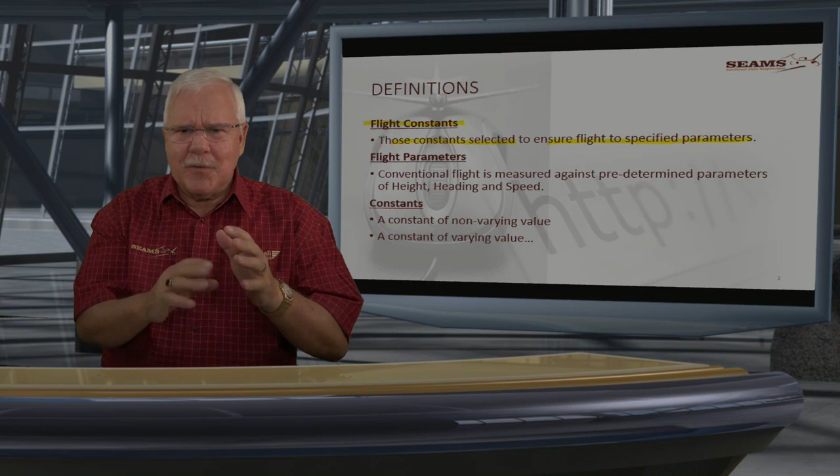We normally select a speed that we want to fly, or we put a certain power setting and the result is what it is. Such as, for instance, cruise power. If you put cruise power in straight and level, the speed you get is the speed you get. You don't control your cruise power, you put cruising power and the resultant speed can change because of weight, density, altitude, and a lot of stuff. I'm talking airspeed now, not ground speed. All right, speed, that's the one thing.

And then heading. We're always asked to keep the heading a constant, or to change the heading as a constant, in other words to use a constant bank. We don't fly around like that. So those are the basic constants that I'm talking about, and they determine the flight parameters that we want to be. Right, we'll get into that.

Flight parameters: conventional flight is measured against predetermined parameters - height, heading, and speed.

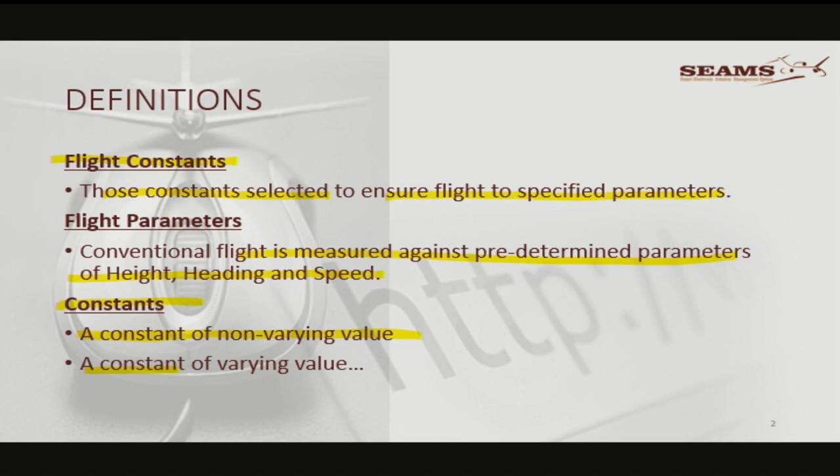Constants. Now I just want to make sure that when I talk about constants, we're not talking about haphazard things happening. A constant is a non-varying value, or I can talk about a constant that's got a continual varying value. Just to take the bank as an example: if we bank at 30 degrees, that is a constant, and the rate of heading change is a constant. We're not putting that and then less, and...

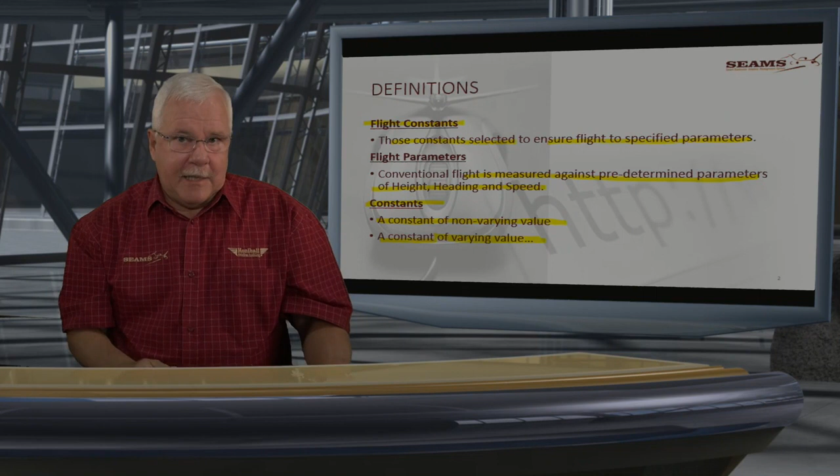So remember, we need to get a point of departure where we're talking about how do we control those parameters that we are looking for in flying.

So here, at this stage I've only spoken about height, heading, and speed - a little bit tongue-in-cheek, but remember that I know we manipulate the power as well. Yes, I know you use the radios and stuff like that. But the things that will control the height, heading, and speed is through the controls of the aircraft, and you can say that the power is one of the controls.

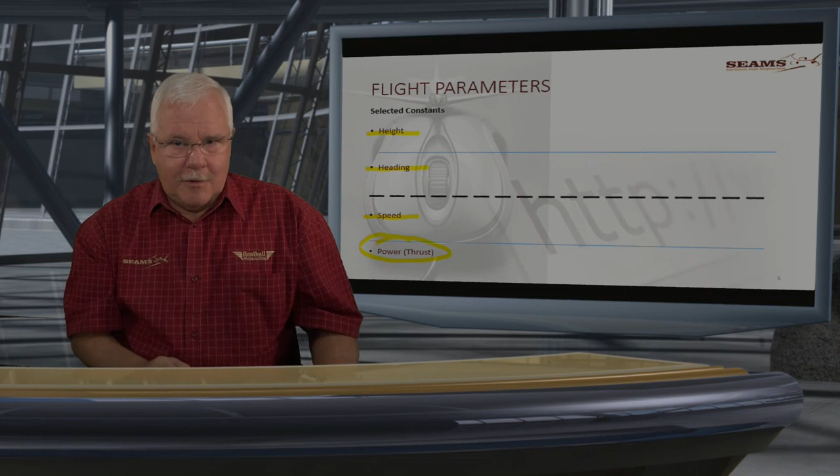So when I look at the parameters, I will say there is either a selected constant or it must have a constant change. Or in certain cases it is just, in fact, a constant. Now what I'm saying here is height is selected to be a constant. Let's say we're looking at, we want to maintain 7,000 feet - then it is a constant, then there's nothing further to do about it.

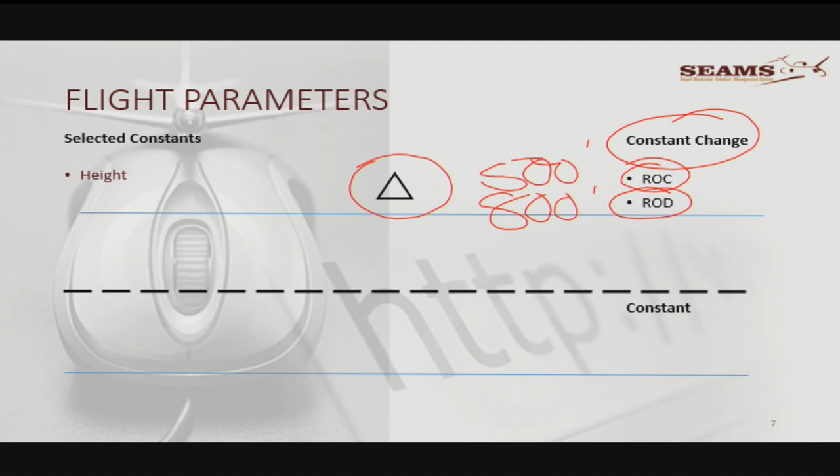However, let's say we want to establish a rate of climb or a rate of descent, then there must be a change - I used the sign delta there. But I say that change must be a constant. We're either going to climb at 500 feet a minute or descend at 800 feet a minute rate of descent, or whatever is selected. But that change, again, is not a faster and a slower and a faster and a slower - the rate of change of height needs to be a constant, will be a constant, not always a selected constant.

If I want to change the height and I just simply push the nose forward and the speed increases, then the rate of change can be anything. Or I will select that.

Now normally, when we do a descent, we want to descend from a flight level to a position where we can start the approach at an airfield. And that descent must be planned very well. In other words, there's a distance, and it'll take us so much time to get there because of the ground speed. Therefore, to get rid of this, we'll have to descend at a certain rate. So those things are selected.

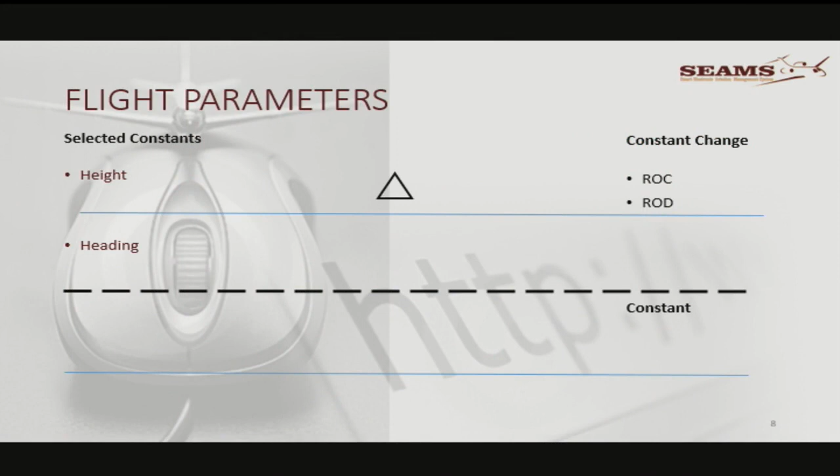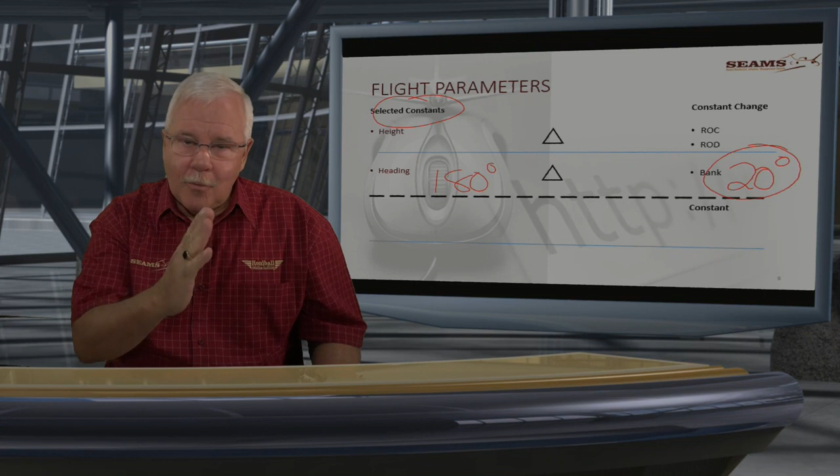It means you must continue and maintain a steady bank of 20 degrees. In instrument flying later on, we're going to say we want you to do a certain rate of turn, and there are rules of thumb on how to work out the bank angle to give us rate 1, rate 2, or rate 3 turns. But that is coming in the future. For now, let's concentrate and say the flight parameter heading is either a heading or a specific bank. Those two go absolutely hand in hand.

And then speed - I've just changed the sign because I had to say, hey, whoa. We don't want a constant change in speed. There will be a constant change in speed if we do, for instance, a loop. But we're not doing aerobatics, all right? So there's not a constant.

From flying level, let's say having excess speed and then eventually settling on your speed in the climb - I know there is a change of speed in the entry into the climb. I got it. But this is not the moment where I want to talk about this.

We want to look at the steady climb speed. We want to look at the steady cruise speed. We want to look at the steady descent speed. We want to look at the steady approach speed, and so on.

And when we make the changes, yes, there will be a change - let's say the final speed is 90 knots and the VREF is 80 knots, then somewhere the speed is going to be bled down from 90 to 80 knots, just an example. But what I am saying is that speed is normally a constant, selected or as a resultant.

Why do I say as a resultant? When I fly straight and level and I've put cruising power - let's say the cruising power in a Robinson 22 is 18 inches or 19 inches manifold absolute pressure - I put that, and the speed I get is the speed I get. So that is a resultant.

And that will stay a constant. If I don't make it heavier or lighter or anything, it'll stay a constant. Yes, I know in the long term you're going to burn fuel and so on, but remember, we're talking about the principle in the wider sense.

When speed is selected - when do we select a speed? Well, when we join a circuit. We will say, all right, the downwind speed is this, the base leg speed is that, the final approach speed is that. So those are speeds you are selecting, and you then change the power and everything to get the selected speed. So there are no continual changes, so to speak.

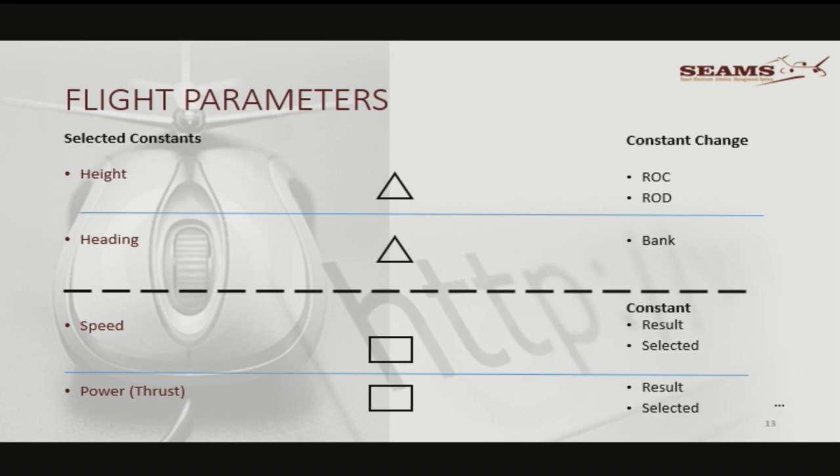Power or thrust, again, is a resultant or a selected value. And how can you say that? Well, I can fly straight and level and I can select either all the power, or I can select max continuous power, or I can select cruising power. So power is something that I can select.

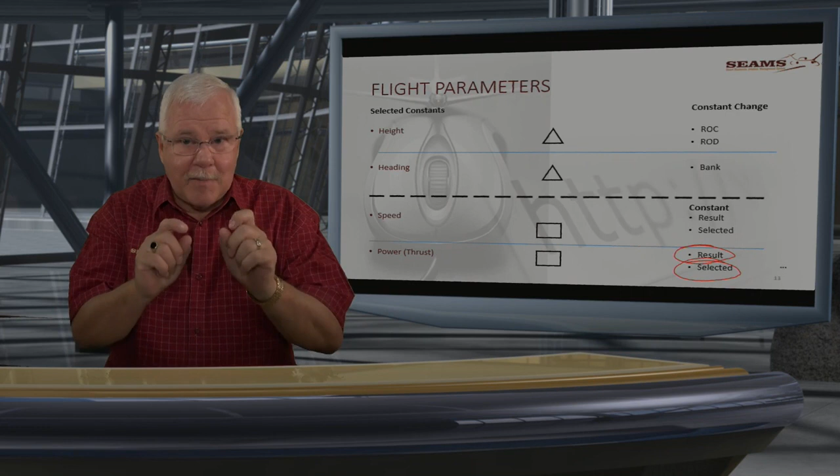Or it can be the resultant. And by the resultant, I mean what is the energy output? I get into this aircraft, I pull all the power, and it's going to give me X power. Maybe one engine is not as fit as the other one, it'll get different results. But sometimes we use power - if the power is completely down, there will be a certain result; if the power is completely up, there's a certain result. So if you select power to have it full, that's it. But I wanted to say that the power available is not always a constant.

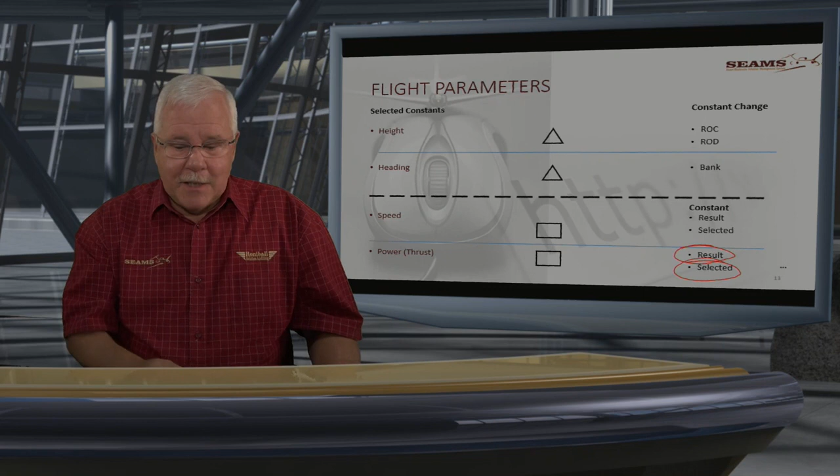But it is a result. It is there. It's not something that we determine in the air, it's already there on the ground.

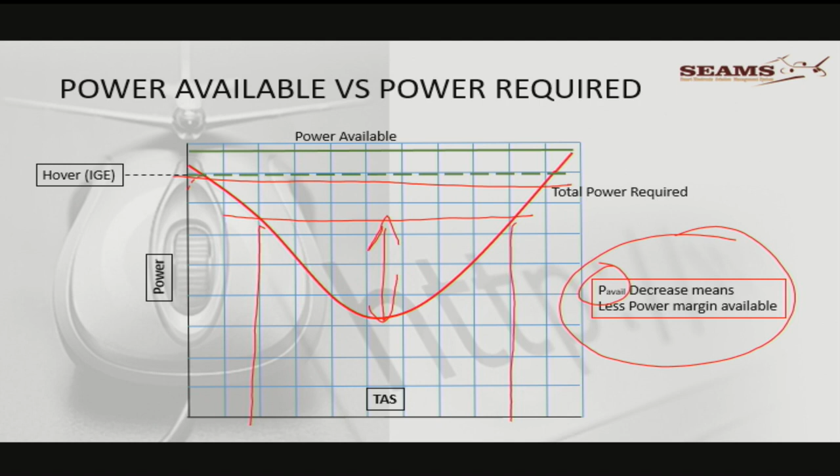Power available decrease means less power margin available. If my power available is less due to increase in height, you can see that the excess power, and obviously the operating speeds and height and everything, changes with it all the time.

Three speeds—just wanted to recap that. The first speed here at the bottom is the so-called Vy, and for Vy we're going to need so much power. Have we got power? Yes, we've got so much power—this is all the excess power that we've got there. Or if we get to our lower speed, formed by that tangential line we put there, we can call this the endurance speed.

And the endurance speed—you can see there is less power available, speed is less, drag is less, but on the total drag curve it shows more.

Then, when you draw this tangent in, you get your range speed, and that speed is roughly Vy times 1.32. That speed is the one we use, including in the descending we discussed—we climb and descend between these two ranges.

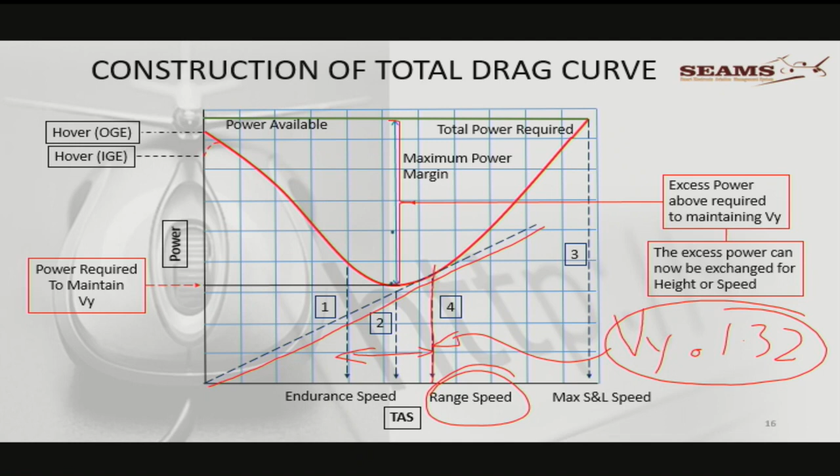That has been said in the previous presentation. Excess power above can now be exchanged for height or speed or whatever—same story, we've seen that.

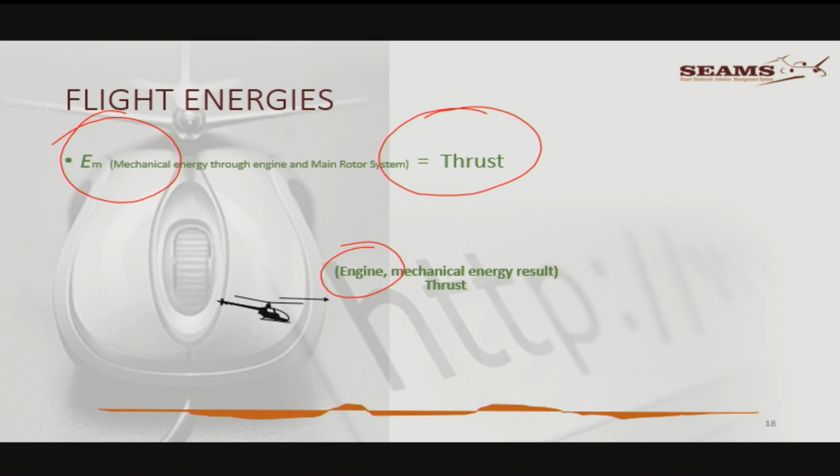When we look at flight energies, this is a concept that I need you just to understand—it's not a big deal, but just know that they are there. The first one is mechanical energy, and mechanical energy is simply thrust, due to the engine. Yes, you could say potential energy gets us there too, but I'm first dissecting the three different main energies that come into play. The next one is height.

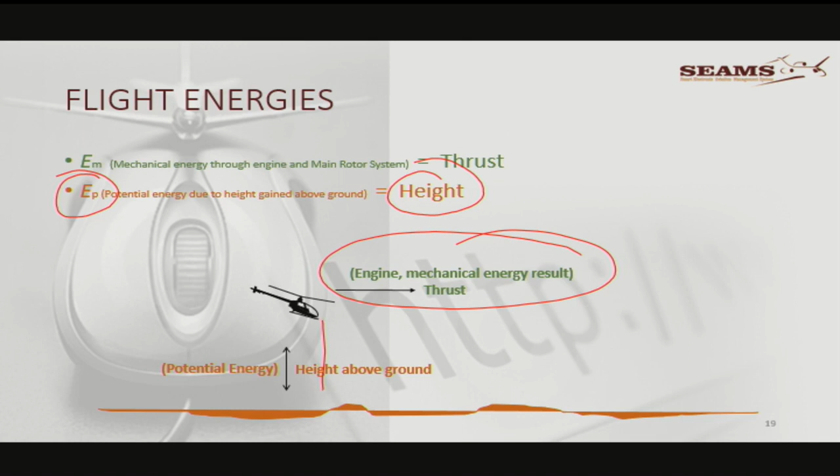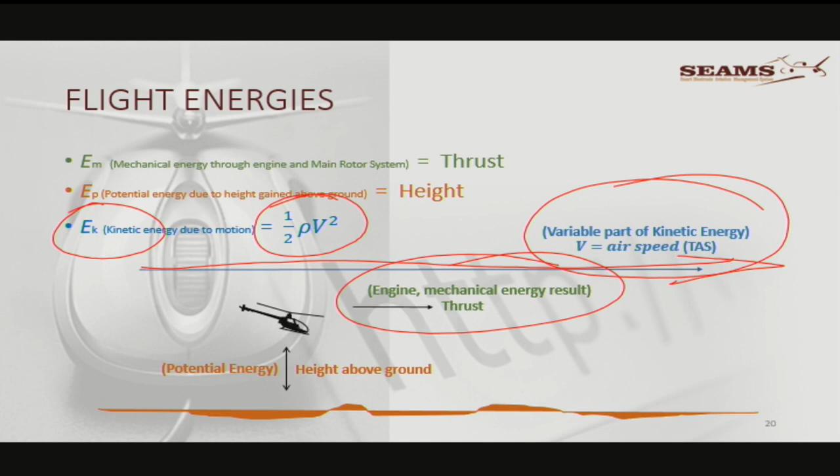Height is potential energy. So now we've got mechanical energy and potential energy. And then we've got kinetic energy, half rho v squared, which is the amount of forward speed that we've got. So there's one energy, one energy, and one energy—those are the three energies.

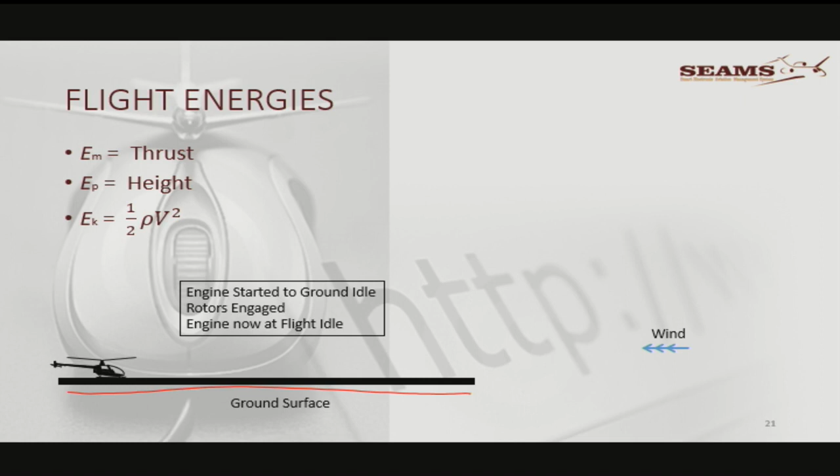So now let's look from takeoff into the hover and forward flight. What are we doing with those energies, how do we exchange them, and what happens to them? Engine started to ground idle, rotors engaged, engine now at flight idle, ready for takeoff. We've got the ground at the bottom, wind coming from the front. Now on the next slide it doesn't go forward—I'm just showing it's now moved into the hover.

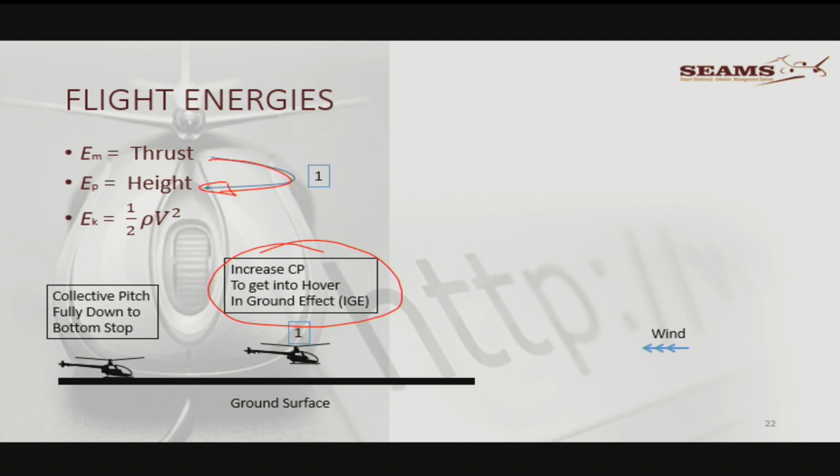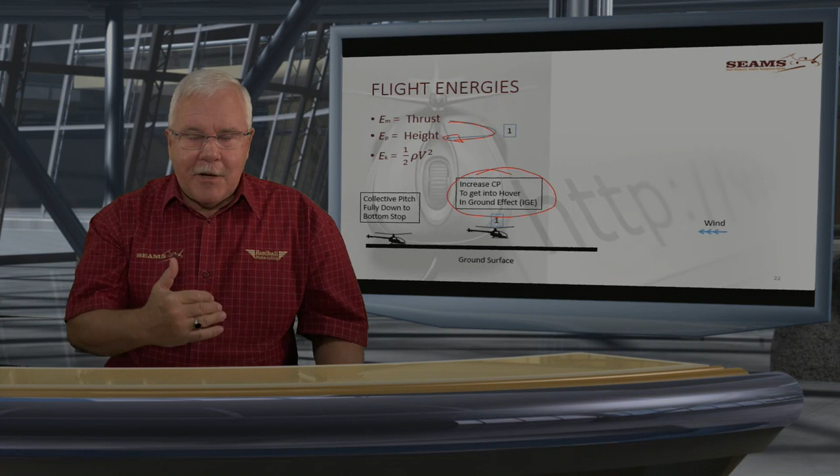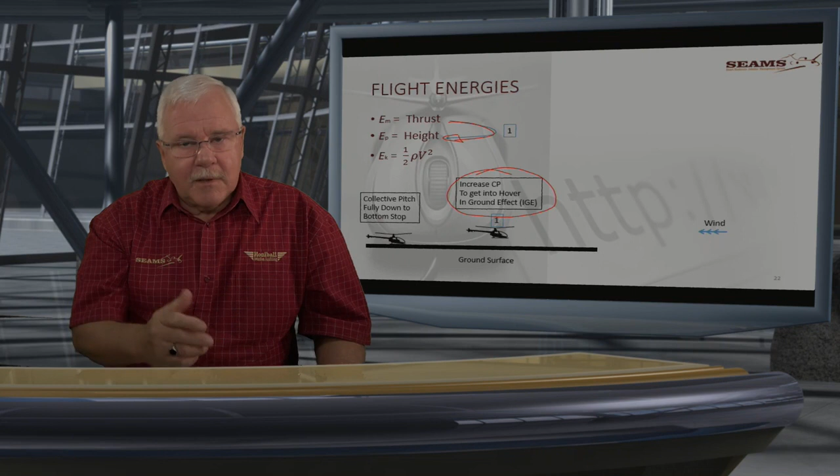That's all I'm trying to say—it's not moving forward. Increase in collective pitch to get into the hover, in ground effect. How did we do that? By simply taking thrust and putting that into height. We used the first amount of energy, mechanical energy, to get a little bit of potential energy, which in many cases in the hover could be 3 feet, 6, 10, 12 feet, depending on the size of the helicopter. Remember, in-ground effect is also a safe height, so that if you get an engine cut in the hover, you can survive the landing on a single engine, or obviously a multi-engine as well.

Now, once we got into the hover, that was the first power exchange—to get height, which was the potential energy. And now, at the same height, we're going to use the excess power to start creating a little bit of speed.

Allowed forward motion through the cyclic movement forward, increase the collective pitch slightly to go through transition. Once we have got the speed, we want to maintain the speed and climb up. At 40 knots, increase to climbing power, cyclic slightly rearwards to climb the helicopter.

At this stage, with the energy exchanges, we are still maintaining a certain amount of thrust to maintain the speed, a constant. We want to keep velocity constant, and then the excess power is put into height and into the climb.

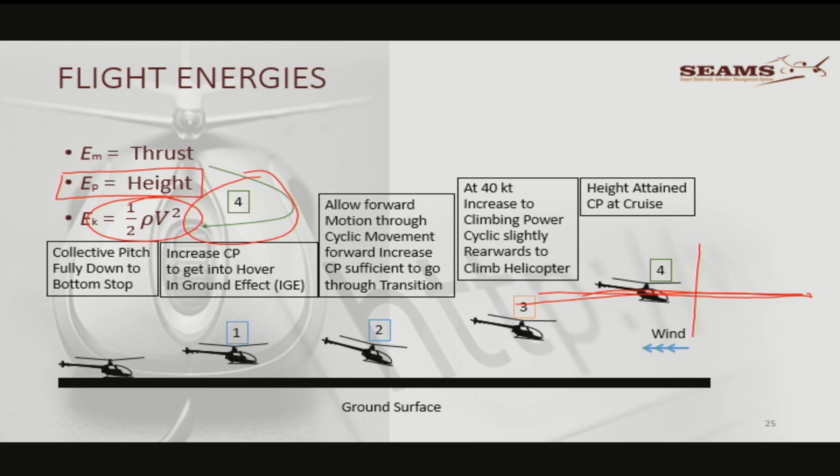Once we level off, we do not want to climb anymore, we have already satisfied the height, we want to just fly straight and level. Now if there's any excess thrust left, and you put normal cruising power, the speed will increase and the energy will go until the aircraft has reached its maximum cruising speed for the amount of energy available. But now it's level, it's already got its height. That's just normal cruise.

So energy usage and energy available are there to support the required parameters. Bringing the two together, kinetic energy, speed, will always be the primary concern and is dependent on either power from the engine through the main rotor or energy due to height gained, potential energy. Potential energy, the height, will always follow the satisfaction of the basic speed requirements.

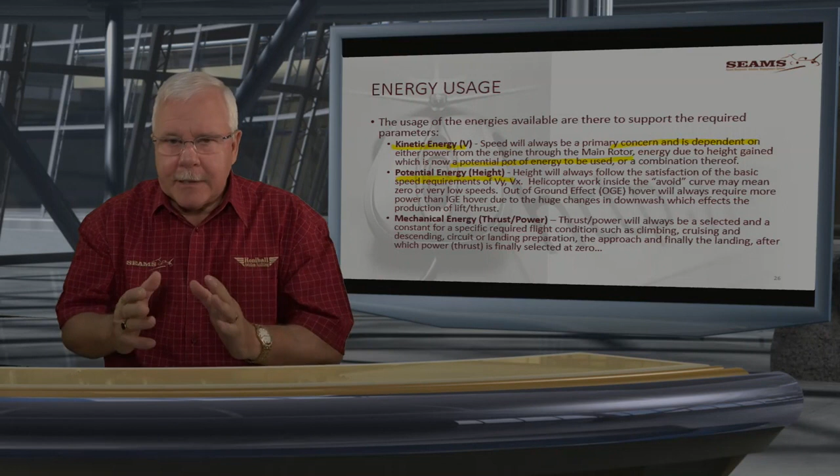Now you're going to say to me, yeah, but what if I climb vertically? Yes, you can. You can use all the excess power and don't have to put it into speed, you can put it into height in the hover, in a vertical climb. No problem, you can do that. That's not how we normally use it if we get airborne out of a confined area or stuff like that, but eventually we're moving from point A to point B. But yes, you could put it directly into potential energy. That's why it's called a helicopter.

So the helicopter works inside the avoid curve, meaning zero or very low speed. Out of ground effect, however, means always more power than in ground effect, due to the changes in downwash, which affects lift and thrust.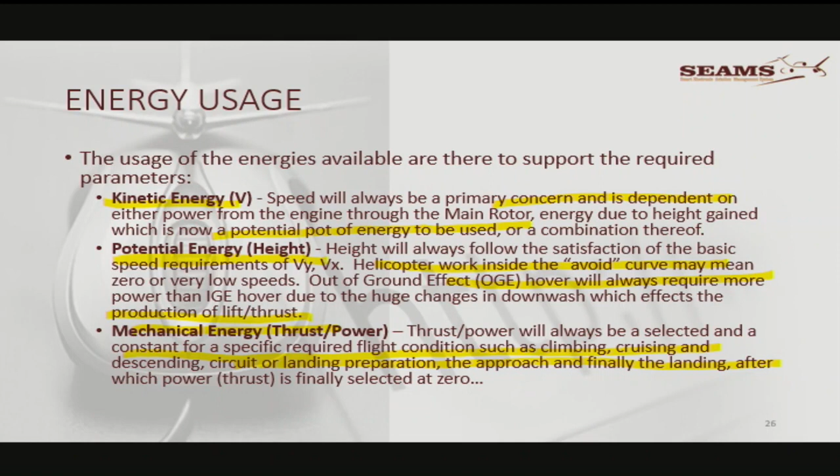Mechanical energy will always be selected to a constant specific requirement, whether you want to climb, cruise or descend, circuit or landing preparation, approach, and so on, until finally when you're on the ground, you will select it to zero.

Now, let's go over to the selection of constants in straight and level flight. I need not just the instructors, the newcomers to the game must look as well, but the instructors too. Straight and level: straight means to give heading in a straight line, so the heading is a constant.

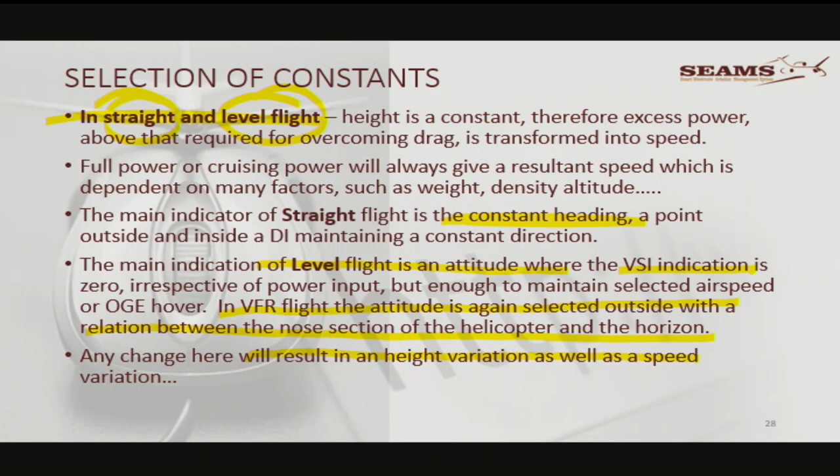And level means that height is a constant. How will we know that the height remains constant? By the VSI indication, irrespective of the power input, but enough to maintain selected airspeed. In VFR flight, the attitude is selected outside with relation to the nose section of the helicopter and the horizon. Any change there will result in a height variation as well as a speed variation.

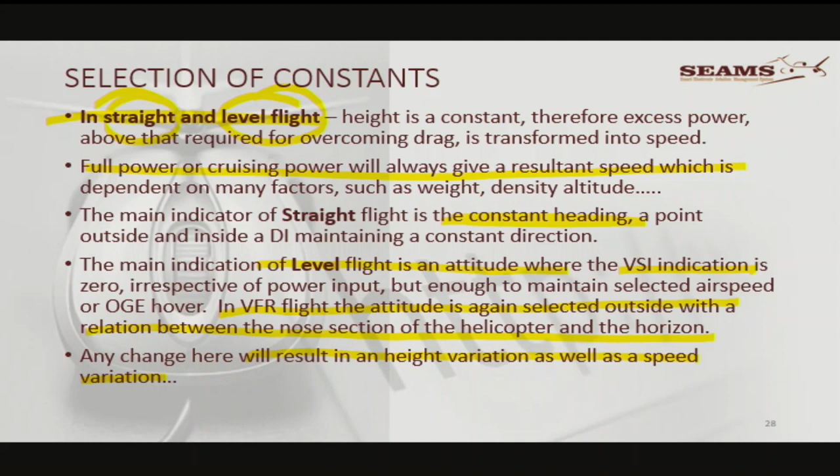Full power or cruise power will always give a resultant speed which is dependent on many factors. The point is that straight and level means: I want to maintain a certain heading and I want to maintain a certain height. That is straight and level, not climbing. That's what it means. So those are the constants that we want to have.

But if we climb, and I'm not taking zoom climb into consideration here, it's a pre-selected speed we want to climb at. The speed will require a certain amount of energy to maintain, and the rate of climb is dependent on the excess power.

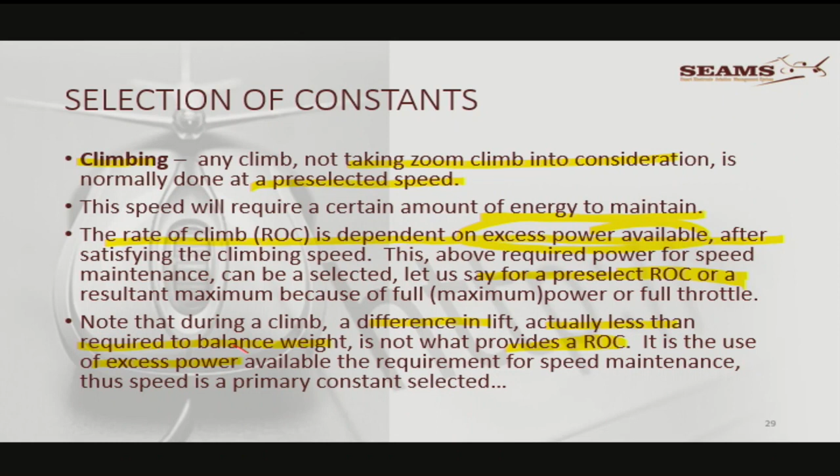Or you can say, look, I want to have a specific rate of climb. Note that during a climb, a difference in lift, actually less than that required to balance weight, is not that which provides rate of climb. It is the use of excess power that gives us the ability to climb.

Climbing, again, only when the selected speed power requirement is applied, the rest can be converted, and we've said that now many times. The use of too much energy for the climb will result in an increased rate of climb and a decrease in speed. Autorotation speed must be kept in mind.

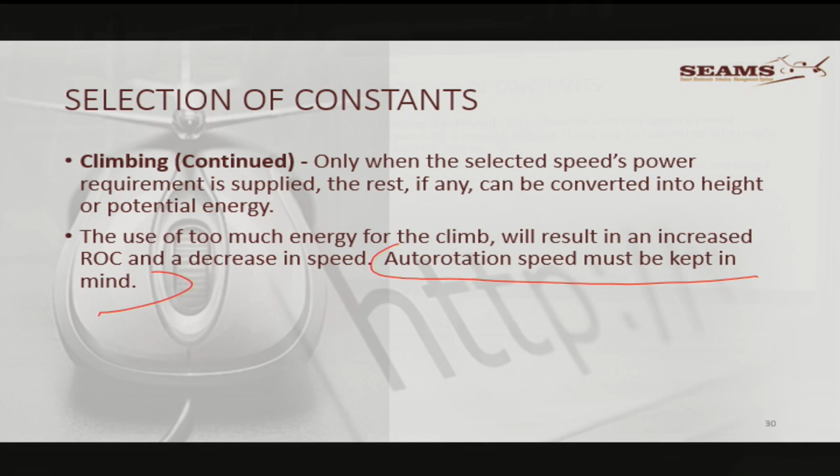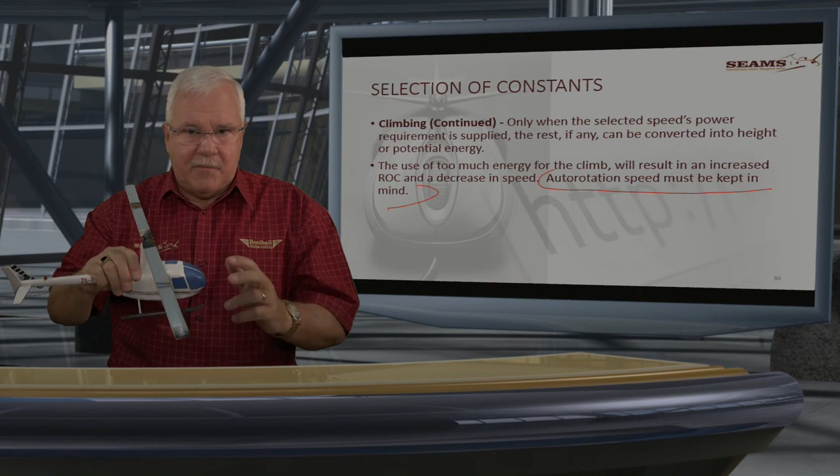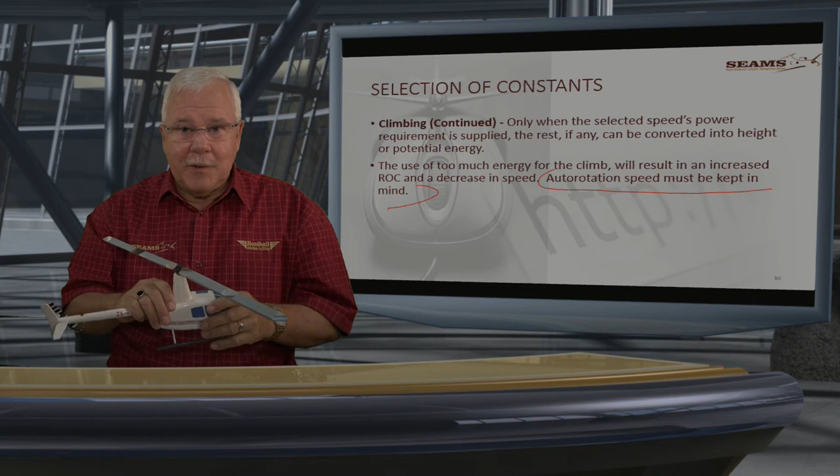So why did I say that? I said, look, you can really take your helicopter and decide, I'm just going to do a vertical climb, because I'm not going to climb at, let's say, 65 or 70, I'm just going to climb vertically. But remember, when you want to auto-rotate, you don't want to auto-rotate vertically down, you won't be able to use that as such because you will be in the avoid area, and this is where you will get recirculation and vortex ring or settling with power. So you actually would like forward speed. All right? So keep in mind the forward speed.

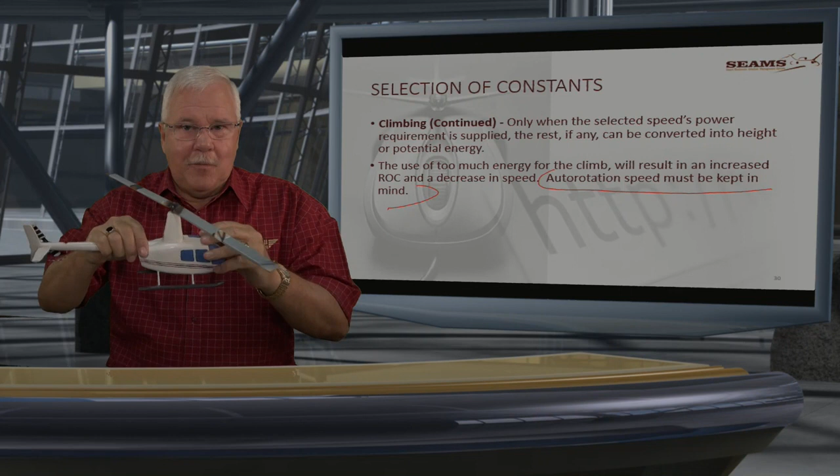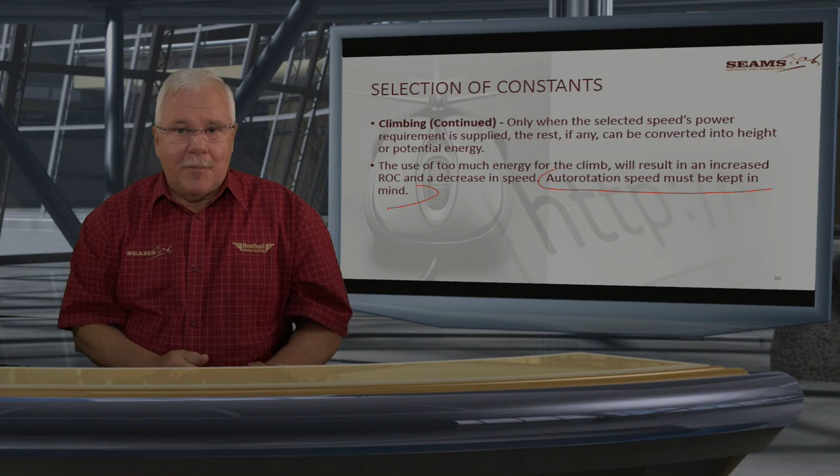If there's an engine cut, what is the minimum forward speed? Now I can tell you that in auto-rotations, your flare and flare effects are mostly the higher the speed, until around about 40 knots, but from 40 knots below, very, very little help from that little friend. Okay, so keep that in mind.

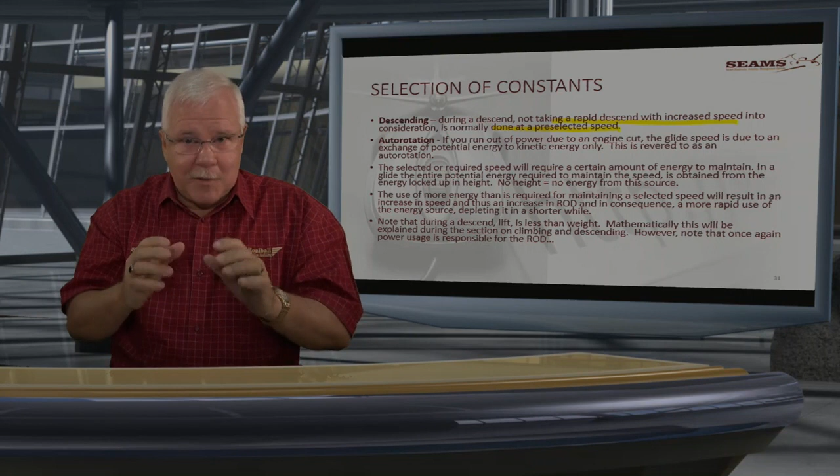Descending, during a descent, not taking a rapid descent into consideration, normally there's a pre-selected speed. So we again are going to descend at a speed with autorotation speed in mind. So if the autorotation speed of this helicopter is 70 knots, then surely I'm going to try and say that my descent speed must be commensurate roundabout with 70 knots. Because I want to be able to go straight into it and already have the kinetic energy that I require for the autorotation.

If you run out of power due to engine cut, the glide speed is due to an exchange of potential energy only, and there's a very, very specific speed that we're saying this speed is now what we're going to use during the auto rotation. No more power. So instead of the aircraft's airflow coming from here, it's now auto rotating and the airflow is coming from the bottom, and that airflow will help to maintain the rotor RPM. But that will be in the autorotative section.

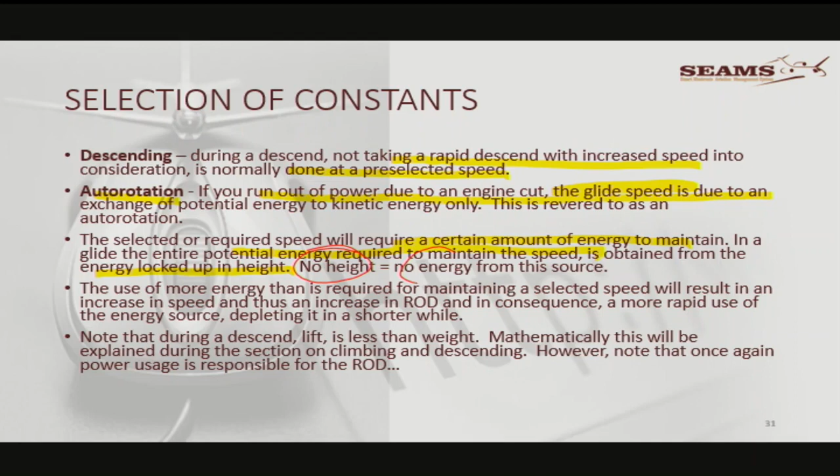The selected and required speeds will require a certain amount of energy. The entire potential energy required to maintain is obtained from the energy locked up in height. Look at this, what I'm saying here: no height, no energy source. If there is no height and no energy source, then if you run out of height and you haven't got an engine, then you and Mother Earth are going to meet up.

At what vertical rate, I don't know, and at what horizontal speed, I don't know. Vertical rate or speed, both of those can hurt. If you fall from 100 foot, there's a good chance that you can break bones and burst some internal organs as well. If you're going forward at 60 knots, 50 knots, and you hit a tree, well, that stop is going to be far too sudden for comfort.

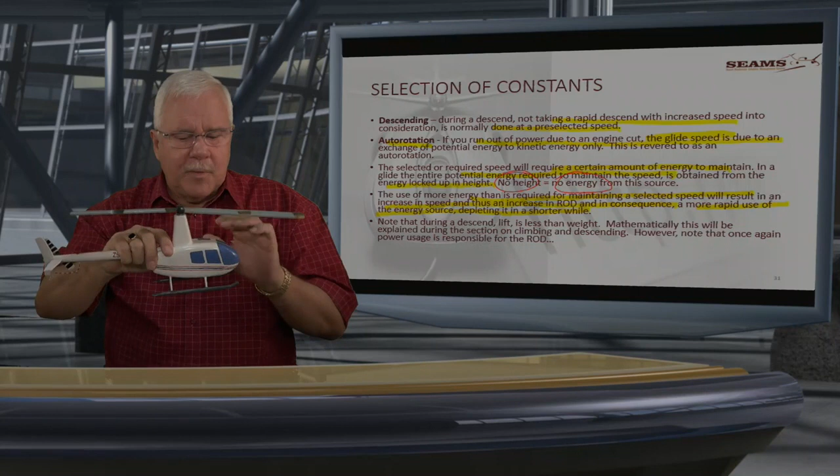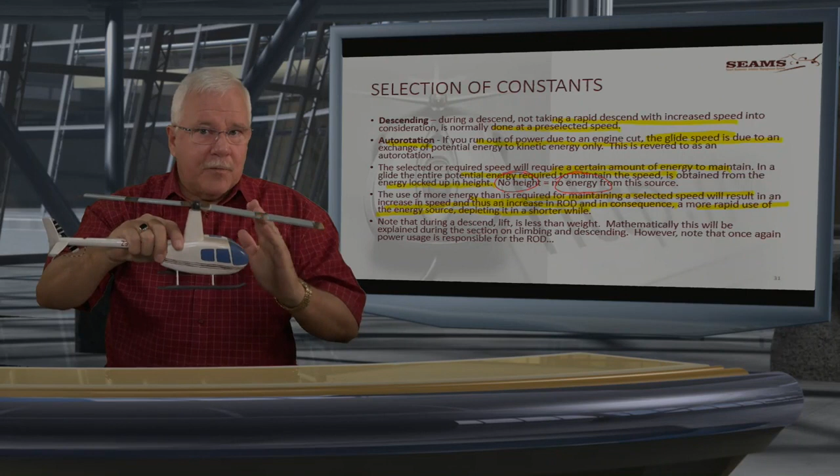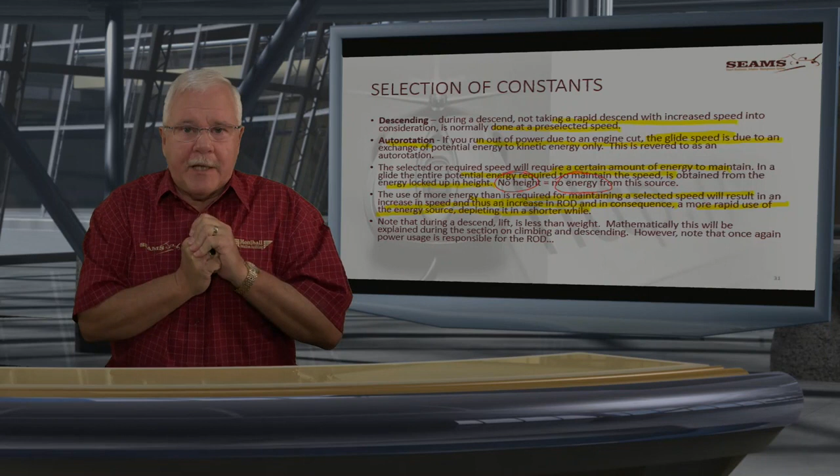So the use of more energy than is required to maintain the speed, resulting in an increase in speed and thus increased rate of descent, but it is a more rapid use of the energy source, depleting it, and it will happen quickly. So the quicker I fly, now in auto rotation there's going to be speeds where we normally auto rotate, but there's a speed where we will auto rotate a little bit faster. It will give us a little bit more translational lift and give us a little bit more distance. But the moment you've got over that speed, then all of a sudden the drag becomes the main factor. So don't think that everything can just happen in any direction without penalties being built in. Penalties are built in all the time.

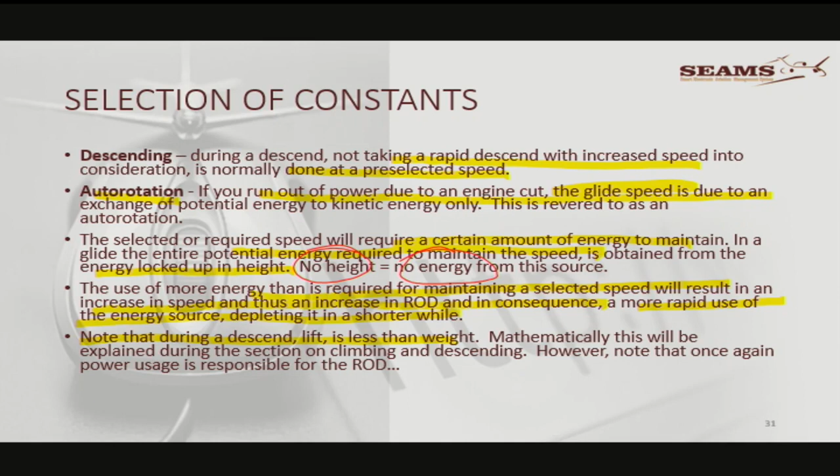Note that during a descent, lift is less than weight. Mathematically, this will be explained, and we have done so, for the rate of descent. Descending, what are the selections there in a descent? Well, we know that thrust and height combined is the source of energy, so we can use those two as rate of descent.

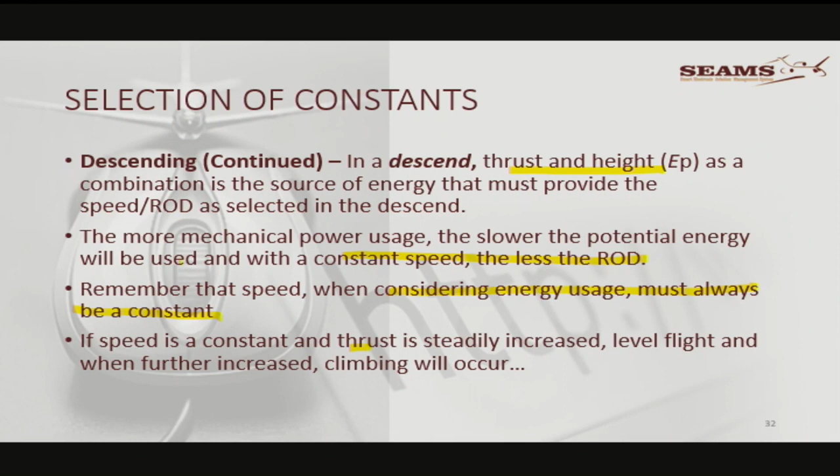So normally in descent, at a constant speed, you can have at least a constant rate of descent if you want, and you can manipulate it by using the power. Remember, the speed when considering energy usage must always be a constant. If speed is a constant and thrust is steadily increased, level flight and...

Descent can also be required rate with the power changes that we now know. Note that the delta in height is normally a constant, or the rate of descent. We descend 500 feet per minute for passenger sake in non-pressurized aircraft. The speed is normally also selected and not a random figure.

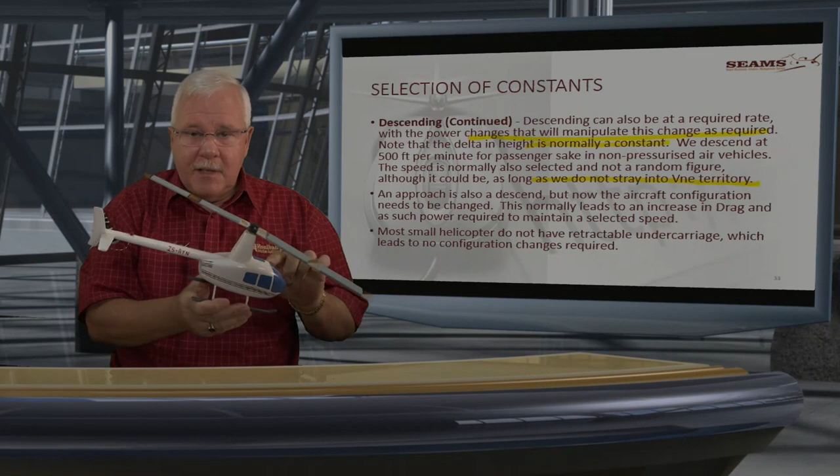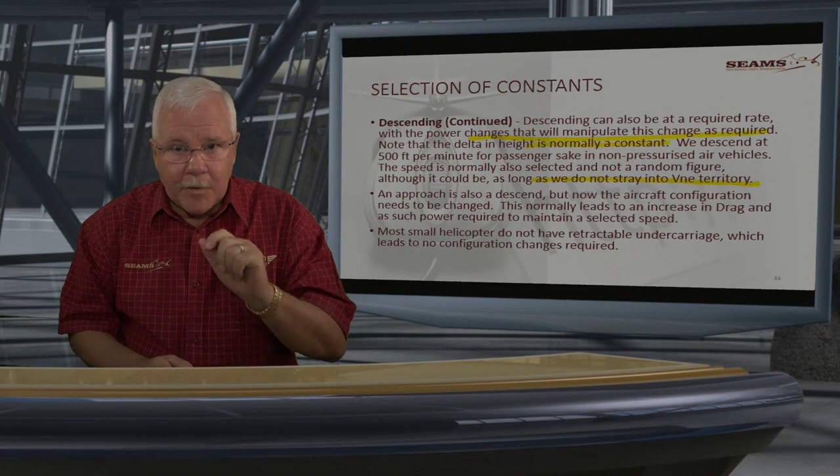An approach is also a descent, but now the aircraft configuration has changed. And if you put undercarriage down, the drag is increased, and so forth. And you'll say to me, hey man, but I'm flying this and it's got no wheels.

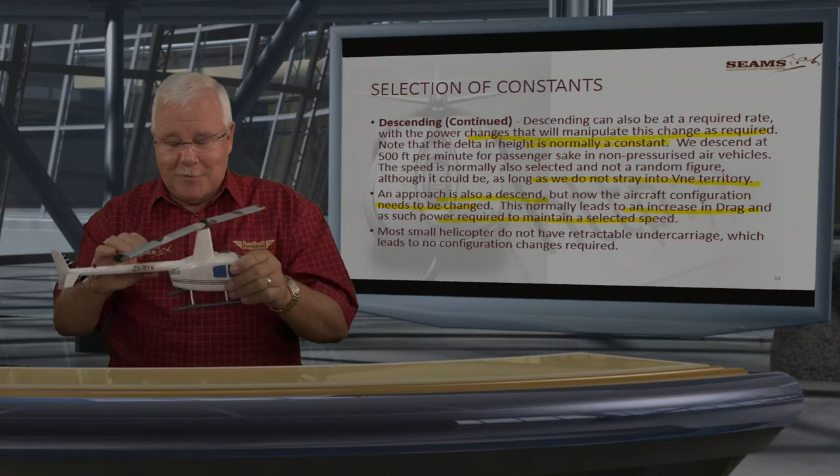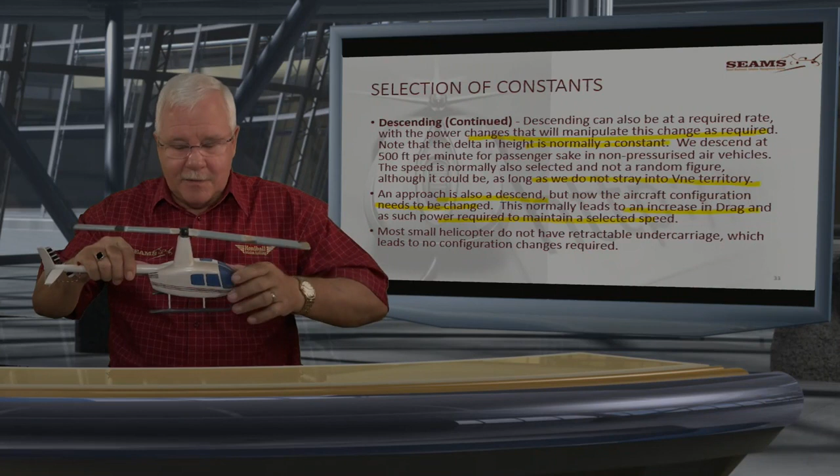Not all helicopters have skids. Some of them have actually got wheels and something to retract, which will reduce the drag in forward flight. But once those wheels come out, then the drag will increase. When it's fixed and welded like here, well, there's going to be no drag change, or there shouldn't be. Most small helicopters do not have retractable undercarriage, which means there's no configuration change.

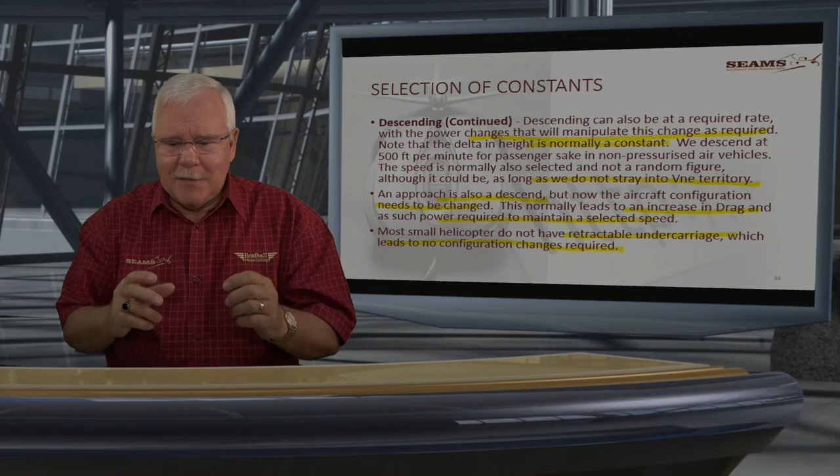And that's normally why, to land a helicopter that's already in this configuration, it's always in landing configuration, it's just a question of going in. But remember, there are certain procedures that one goes through. It is not something that is hard and difficult and makes a big change, but remember, you always go through it just to cover and make sure that you have covered all the points.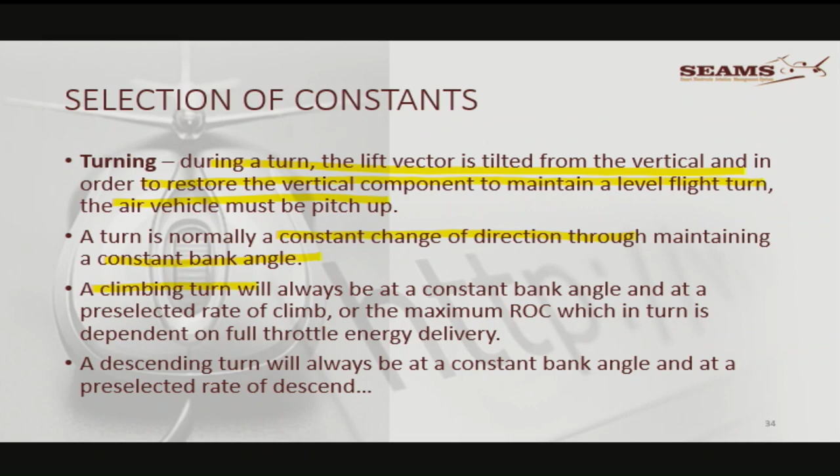Turning. During a turn, the lift vector is tilted, and to maintain the vertical component for level flight turn, the aircraft must be pitched up. Now here we've got the constants: it's a constant change of direction, constant bank. You can have a climbing turn, a descending turn, or a level turn.

So now you must decide on the constants. The one thing is there's going to be a constant change of heading, whether we are climbing or descending, but it's a constant rate of climb, or a constant rate of descent, or a constant height. So those are the constants. Height will either be a constant or a constant change. Heading will be a constant change, it'll go from a constant heading, through constant change, unto a constant heading again.

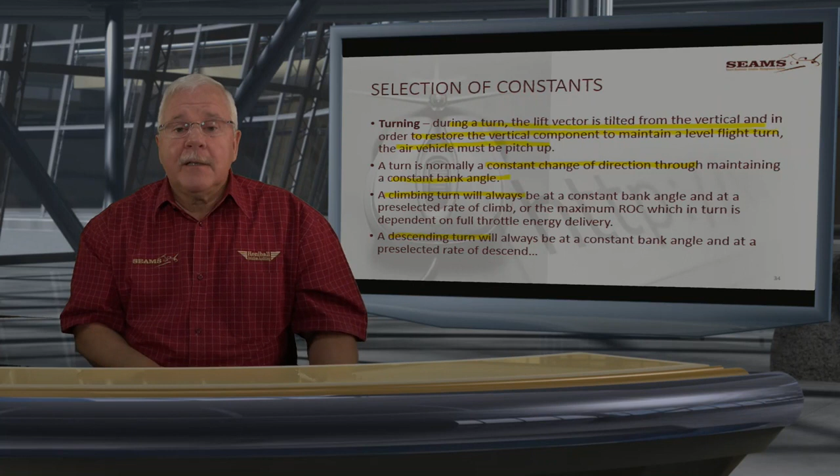And the speed, well normally in normal turns there's going to be a little bit of a loss of speed, we don't do much about that. But remember, when you do a steep turn and the speed reduces, it might actually mean that you'll have to increase the power, to climbing power, to maintain the speed, always keeping auto rotation in mind.

Now, oh goodness, how did I do that? Just want to make sure that we are there, right?

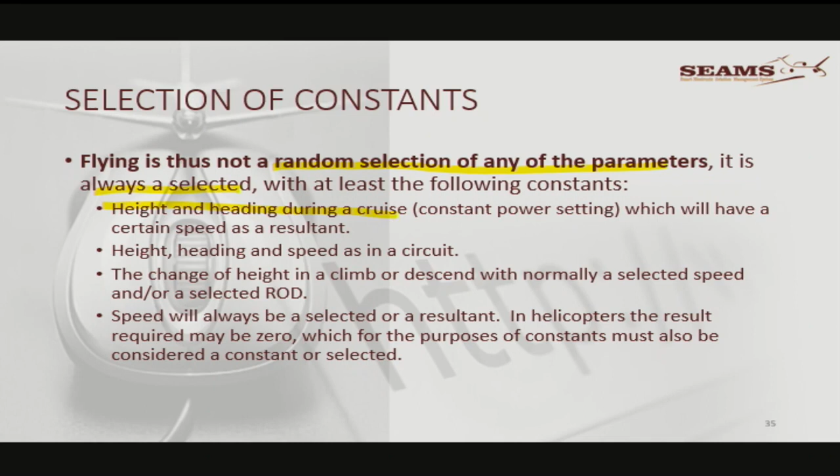Flying is not a random selection of any of the parameters, it is always selected, it is not a random selection, it is always selected. Height and heading during cruise will end result in the speed being pretty much constant. Height, heading, and speed as constants in a circuit. Downwind is at a specific height, downwind is at a specific heading, and downwind is at a specific speed.

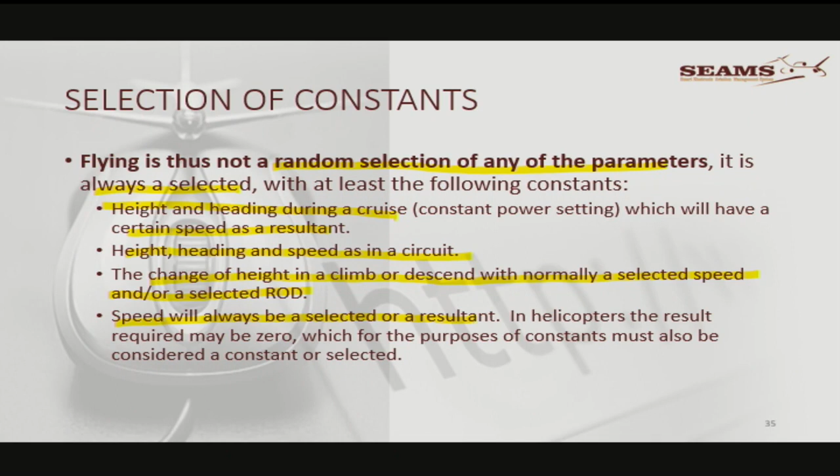So the approach: the change of height is normally selected speed and the rate of descent. Speeds will always be selected or be a resultant. In helicopters the result required may be zero, which for the purpose of constants must always be considered a constant or selected.

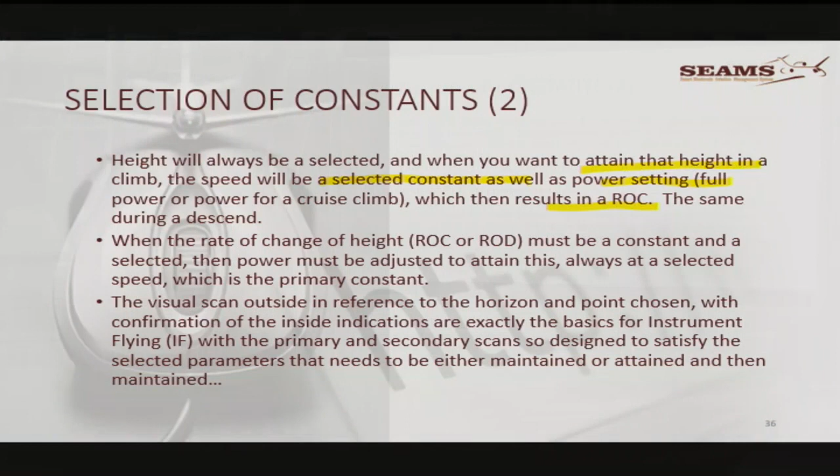Height will always be selected, and when you want to attain that height in climb, the speed will be selected. The speed is a constant to get there, as well as your power setting, and that will result in a certain rate of climb. If you want to change the rate of climb, that is fine, but the speed must stay constant. If the speed stays constant, then the resultant rate of climb during power manipulation is correct. If the speed starts changing, it's not right. When the rate of change must be constant and selected, the power must be adjusted to attain this—always select speed, which is the primary constant.

Selected speed, primary constant. The visual scan outside in reference to the horizon and a chosen point, with confirmation from inside indicators, is exactly the basics for instrument flying, with a primary and secondary scan designed to satisfy the selected parameters that need to be either maintained or attained.

What am I saying here? In normal flying, we know that I want to stay level, I want to point outside, I want the attitude, and I want to check it's clear outside, and inside the heading is a constant. All of that is quite nice, but secondary scans—the balance, the right—yes, all of that works very well.

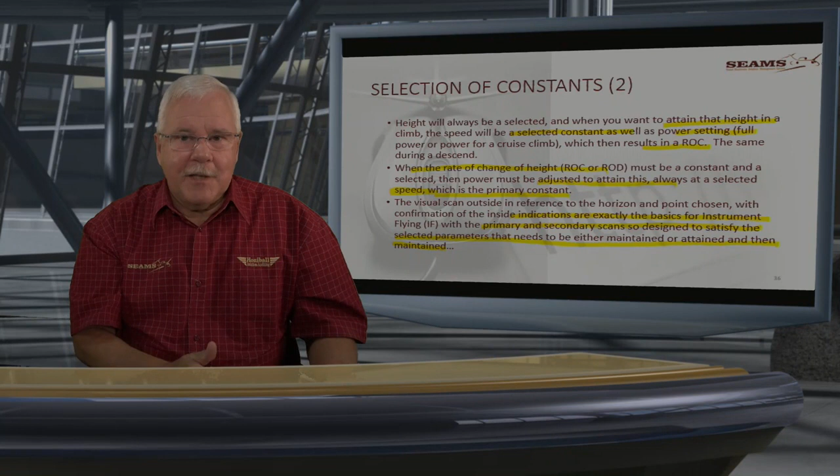Should we go onto instrument flying, then instead of using the big horizon outside, instead of using the horizon, we're going to use the AH, the artificial horizon, inside. Same thing, just miniature. Outside I can see attitude, I can see bank. Inside I can see attitude and I can see bank. So one is just the God-given horizon on the outside, and the inside we've got the artificial one—same function, except the outside one is for visual flight and the inside one is for instrument flight conditions.

In conclusion, simply put, when you have no more source of energy through the power available due to engine cut, mechanical failure, or fuel starvation, and you've run out of height, speed cannot be maintained anymore and the helicopter must be landed. Oh, it's one of those things—speed needs something to feed it. Height, you can give it up. There's an energy that you can give into the system.

Mechanical energy is there. If you take the mechanical energy away, then we are sitting only with two energies: potential energy and kinetic energy. Kinetic energy is what we must have, and the only energy to feed in to keep that, the only energy available, is height—nothing else. That's your potential. The helicopter cannot fly without satisfying the basic speed requirements.

So, should you have an emergency, main rotor RPM control in conjunction with the forward speed requirements, to avoid very vertical descents, must be considered. Yeah, the vertical descent is a bad one when you get close to the ground.

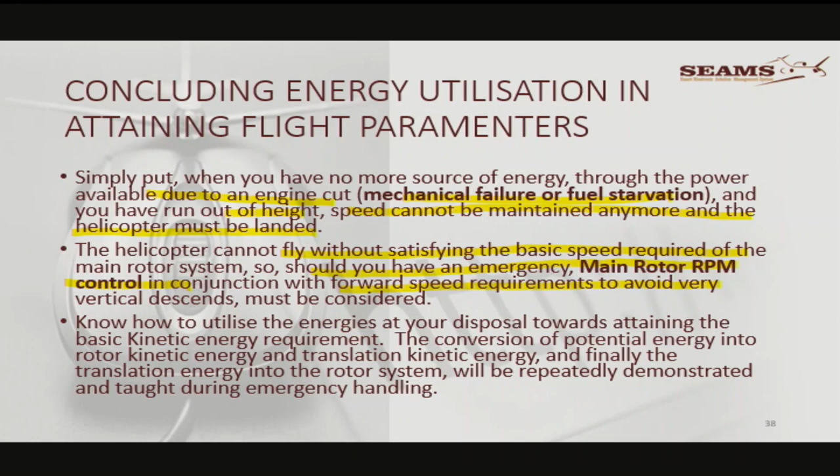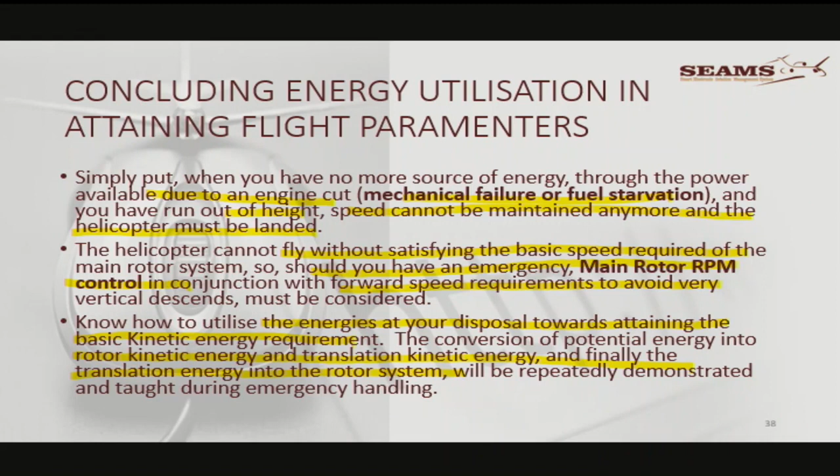Know how to utilize the energies at your disposal towards attaining basic kinetic energy requirements—the conversion of potential energy into rotor kinetic energy, and finally the translational energy into the rotor system—will be repeatedly demonstrated and taught during emergency handling.

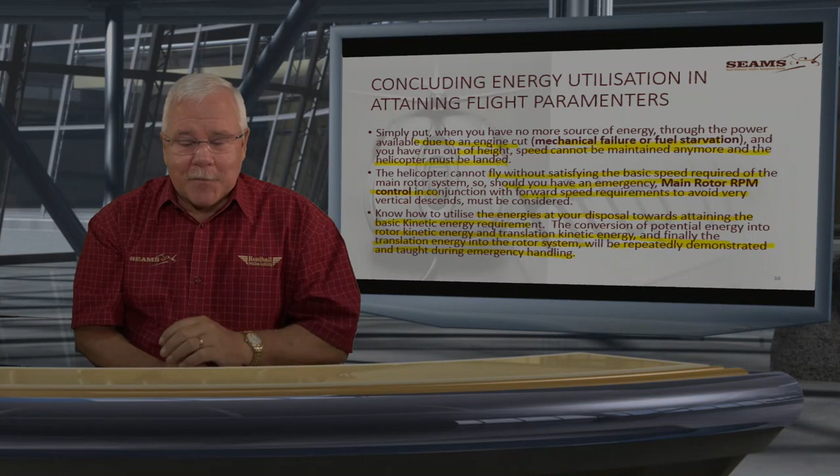So, whoa, okay, this is a mouthful, and we're going now slightly from the theory to the practical. But I want you to see that the theory is 100% the basic point of departure for the practical. It's not, okay, forget now what you've learned there, this is how we do it here—it doesn't work like that. If you do that, you're going to be bitten. Don't get bitten, it's not necessary.

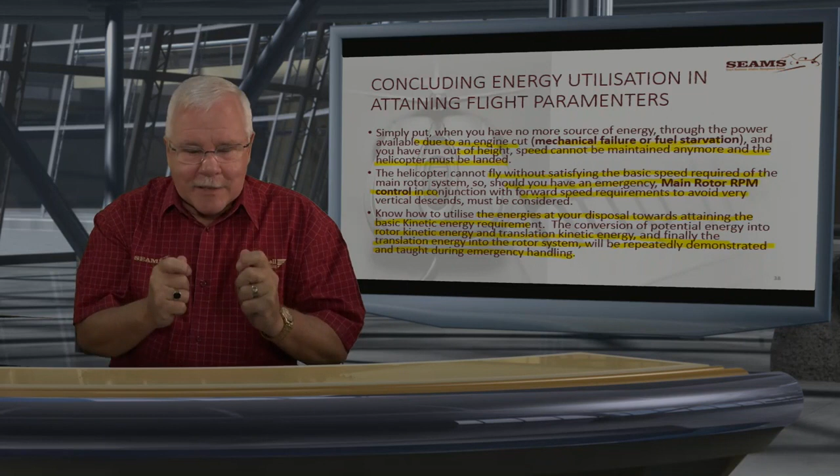The conversions of energies, you must understand that. But I think you should after that. So,

Helicopter constants in flight—you can think for yourself that fixed-wing constants of flight are pretty much the same. They just don't have something like autorotation, but they will also have a climb, a zoom climb, a descent, or you can go further in that. You can say we'll have a max rate descent.

In helicopters, I could have gone to the advanced stages and said, hey, we want to really get out of the sky—how fast can you get out of the sky in a helicopter? Just collective down and autorotation? No, there are methods that you can go faster out of the sky without hurting the machine or anything to that effect. But that is a topic for the advanced sections. In the meantime, keep the swotting. See you in the next round.